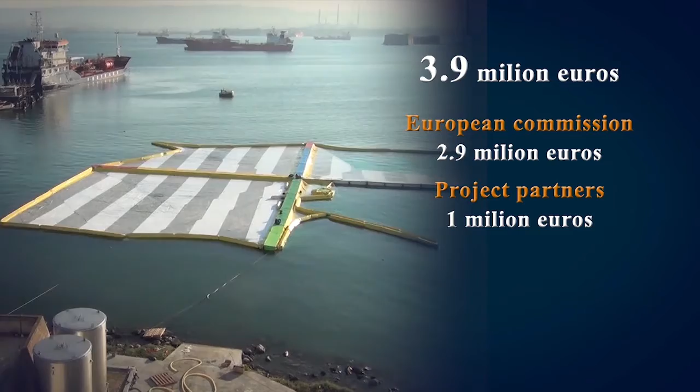the European Commission, and the residual part was funded by the project partners. The project will run for 4 years and will be ended in 2014. The coordination of the project is carried out by the Department of Chemical Engineering, Materials and Environment, DICMA, of the University of Rome La Sapienza, and the partnership is formed by 10 subjects: Italian, Danish, Indian, Latvian, Jordanian and Spanish.

The infrastructures are located in the Bay of Augusta. The plant is built in sea in a watery mirror given in concession by the maritime state property for all the duration of the project, as well as the ground, where the equipment are positioned for the production of biogas.

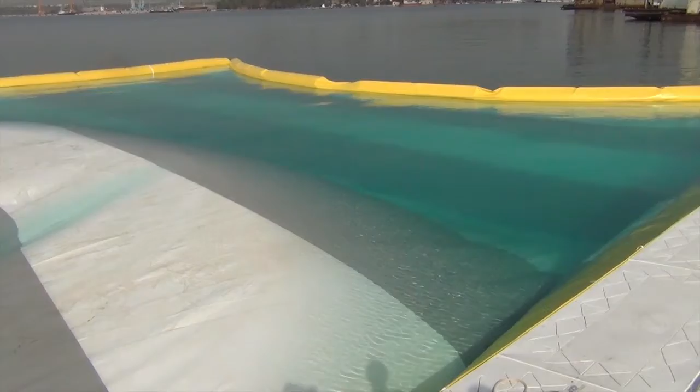All inputs will be introduced in 4 PVC open ponds, where the selected macroalgae will be cultivated, or in a homogenization tank. This allows the control of the cultivation parameters, unlike the open sea. In fact, jet air connected with the ponds will provide water and CO2 to the algae broth, guaranteeing biomass mixing.

The Biowalk4Biofuels project. Biomethane from algae as a vehicle fuel. Process description. The B4B process uses several units to produce renewable energy from algae. Let's follow the main points of the process.

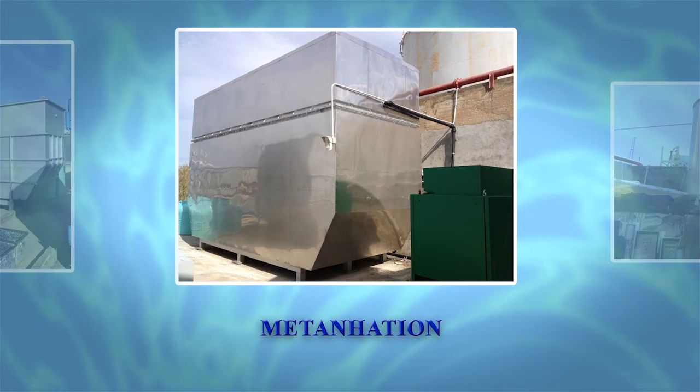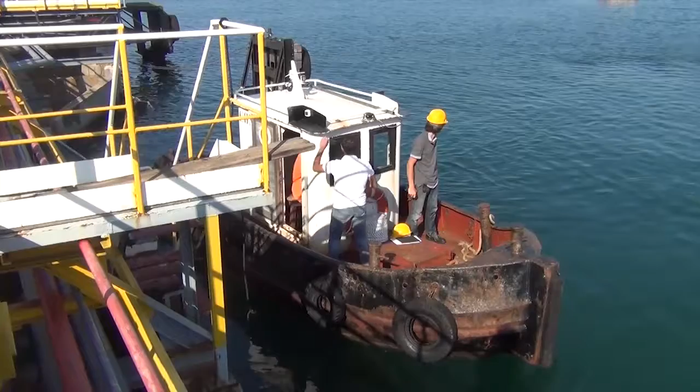The B4B promotes a new kind of algae cultivation using 4 PVC open ponds, in total 3,600 square meters, in which a macroalgae selected for the project was cultivated, Ulva lactuca. This artificial environment allows the control of the cultivation parameters, unlike what happens in the open sea. The ponds are provided with seawater and CO2 in order to guarantee both biomass mixing and CO2 fertilization.

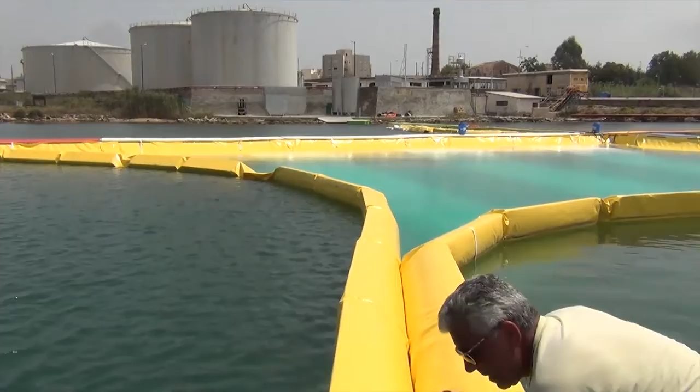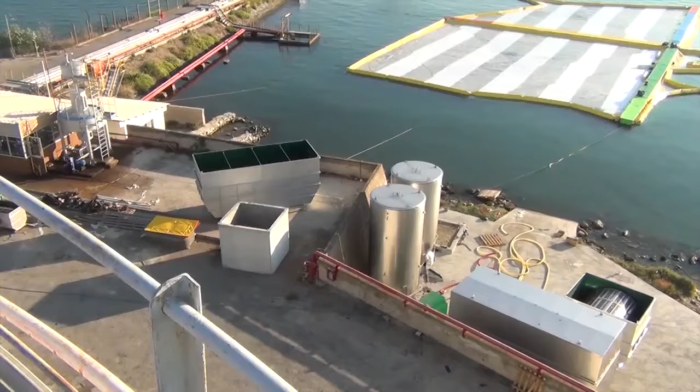At the same time, eutrophicational agents coming from the biodigesters, a unit of the process, were introduced after undergoing an appropriate treatment, achieving a closed cycle. The management of the cultivation assures a strict control of several parameters: pH, nitrogen compounds, phosphates, etc., avoiding uncontrolled water exchange with the open sea.

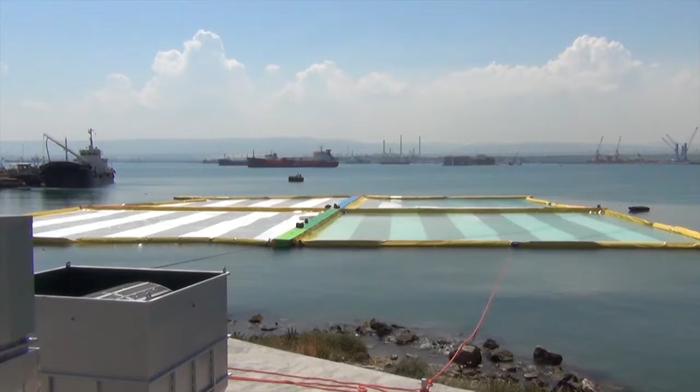Controlled open ponds. We have designed a remote control system that, thanks to the electronic sensors, remote-controlled valves and remote-controlled pumps, permitted all the Biowalk4Biofuels partners a total remote control of the entire demonstration plant. Thanks to this advanced package of software and tools, we were able to assure a remote management and supervision at a very high level of safety and reliability.

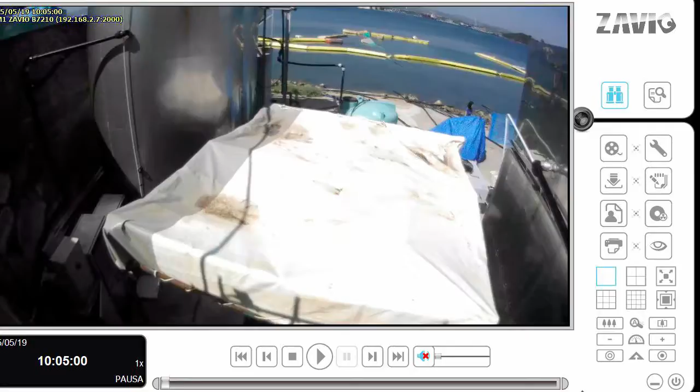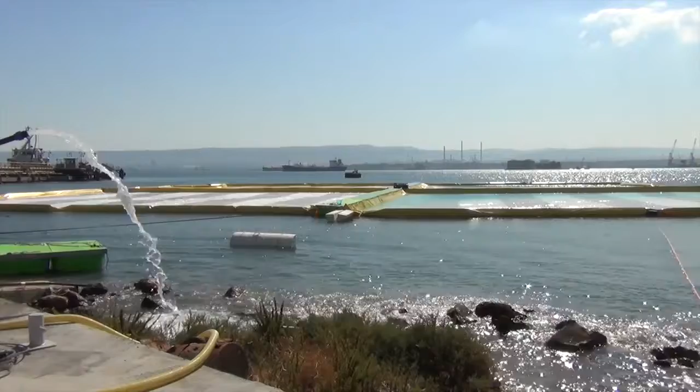The construction of the open ponds plans to achieve 2 important targets. First of all, algae growth is related to the climatic conditions of the place where the cultivation is established. Second, the system allows to optimize costs in order to produce an amount of biogas of 20 cubic meters per hour, sufficient to power the cogenerator and ensure a sustainable energetic process. An input of 400 kilograms wet of algal biomass in the B4B digester, and 3,600 square meters of open pond surface are necessary.

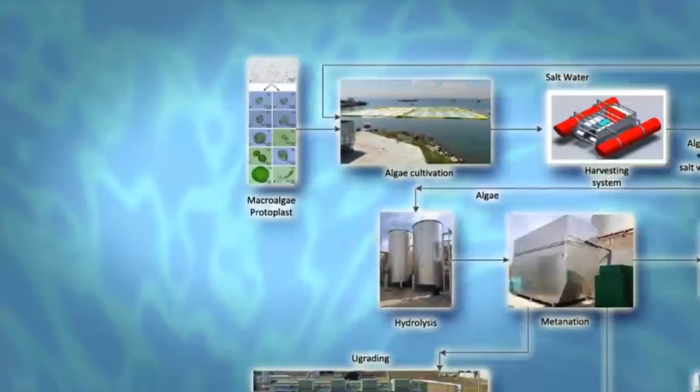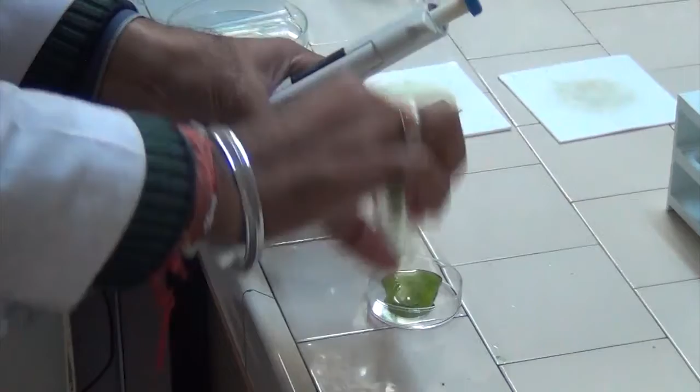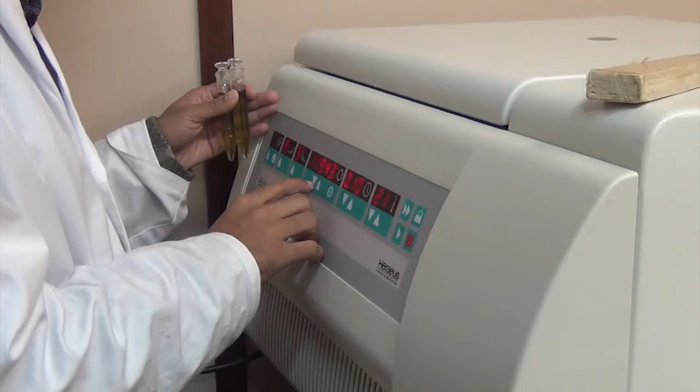Protoplasts. The use of protoplasts as feedstock for cultivation using a protoplast-based seedling production facility made easier the generation of required seedstock for feeding of floating tanks regularly. A protoplast incubator was to be used to produce protoplasts to feed the open ponds with new little algae. This type of cultivation in an incubator results in an increased productivity and a higher biomass yield.

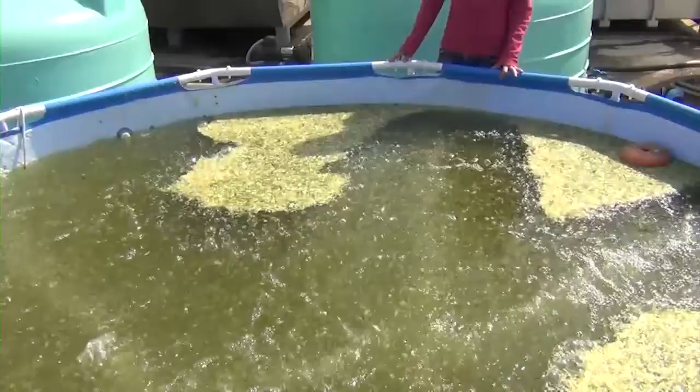Protoplasts are living plant or algae cells without cell walls, which offer a unique uniform single-cell system that facilitates several aspects of modern biotechnology. The incubator aims at demonstration of the use of protoplasts as an alternate source of spores for cultivation of green seaweed Ulva. This facility basically facilitates continuous production of seeding biomass required for a large-scale cultivation.

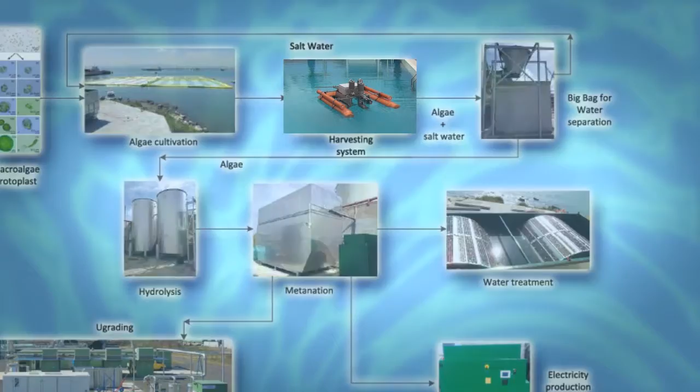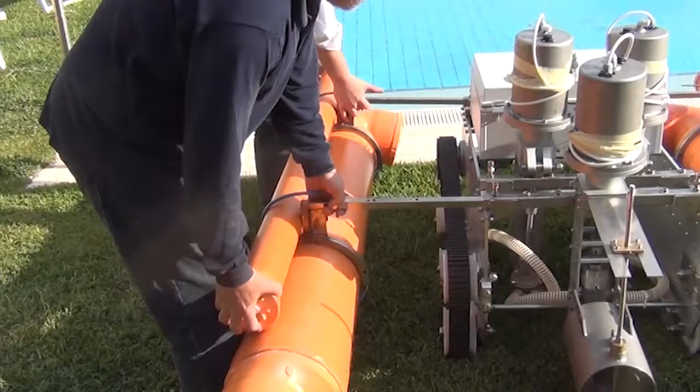Harvesting system. The harvesting system represents the link between the open ponds and the subsequent anaerobic digestion process. For this task, we used an automated drone planned and engineered for the B4B purposes that could harvest directly in the open pond the daily amount of algae. The drone took the algae amount close to the collection point, where a pump sent all harvested algae to the

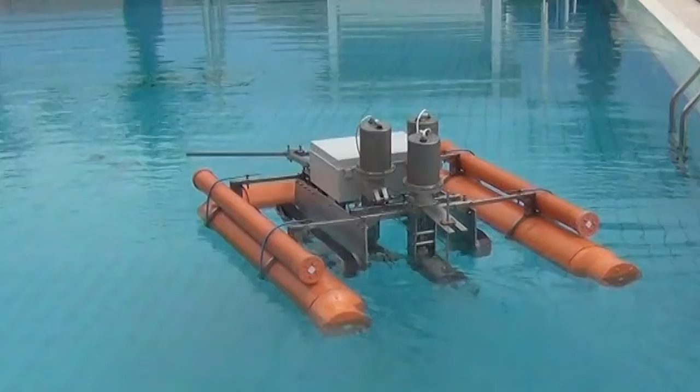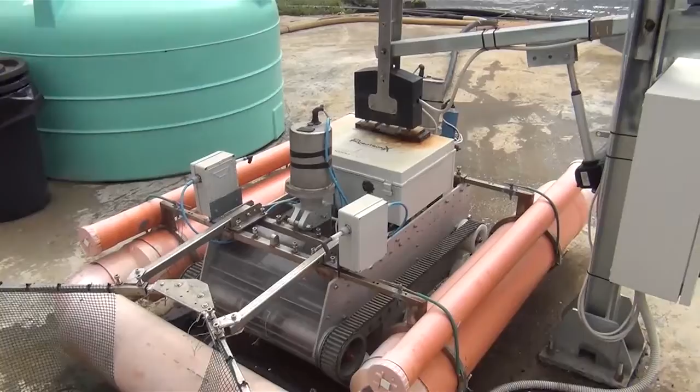preparation section. All the harvesting paths and the return paths to the base for battery charging are guaranteed thanks to a precise GPS system mounted on board that exchanges data with the central server. All the technology for the construction of the drone was developed by the partners involved in the design and management of the harvesting system. The automation system is managed by software developed in the programming language LabVIEW, totally open for the necessary changes during the research.

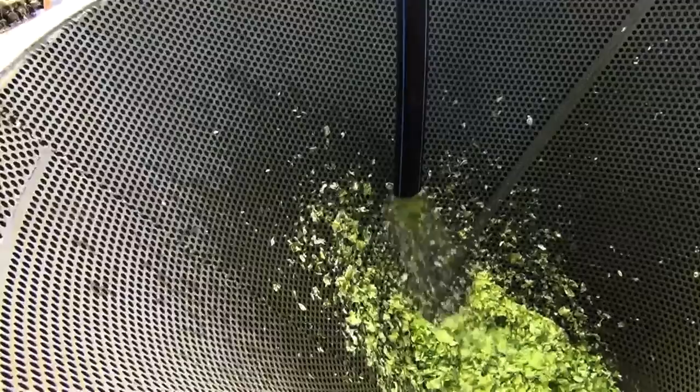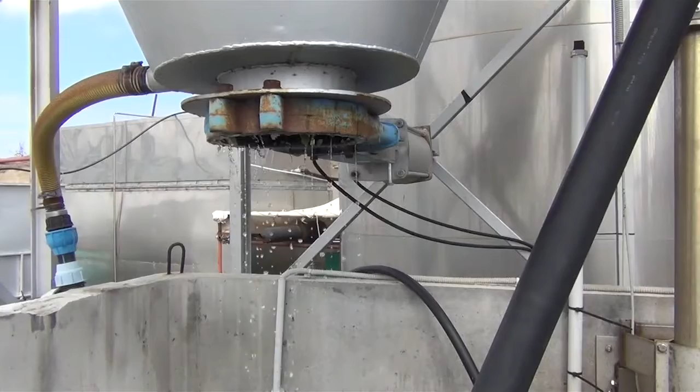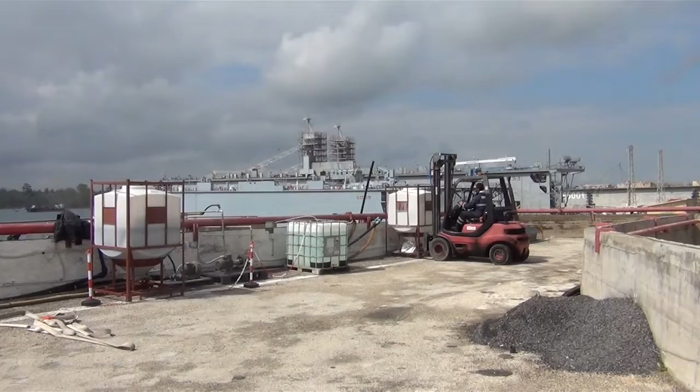Preparation tank. The preparation of the biomass mix, which is the input of hydrolysis and methanization, takes place in a pre-treatment phase. In this step, there are many sensors monitoring the level of input biomass, giving the start-stop input to a grinder pump and a signal to open-close automated valves. The preparation tank, whose volume is 12 cubic meters, receives all the biomasses used in the process, and thanks to the grinder pump and clean water, permits better control of the density of biomasses in the input of the hydrolysis tanks.

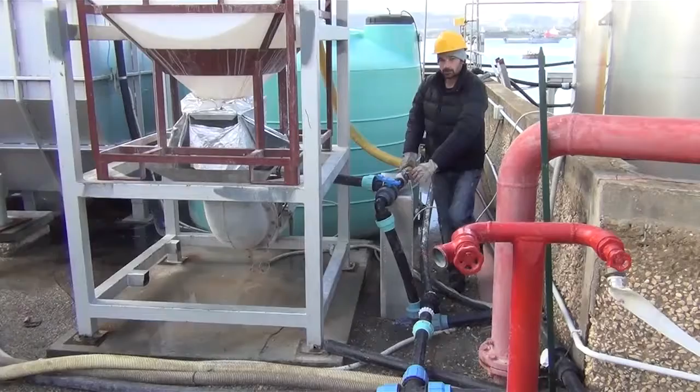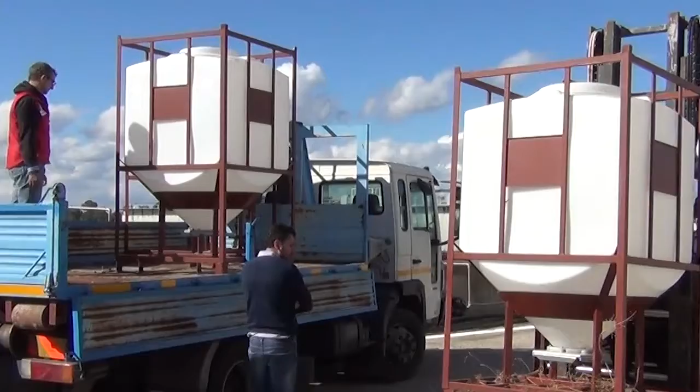Big bag for macroalgae biomass. The big bag permits to separate, for each batch input, 500 liters of salt water from wet algae without using energy. From the big bag come macroalgae biomass harvested from open ponds. The big bag castle is placed over the preparation tank. Thanks to the software developed for this process, it is possible to automatically control the charging phase of the algae and their separation from the salt water and its recirculation to the open ponds.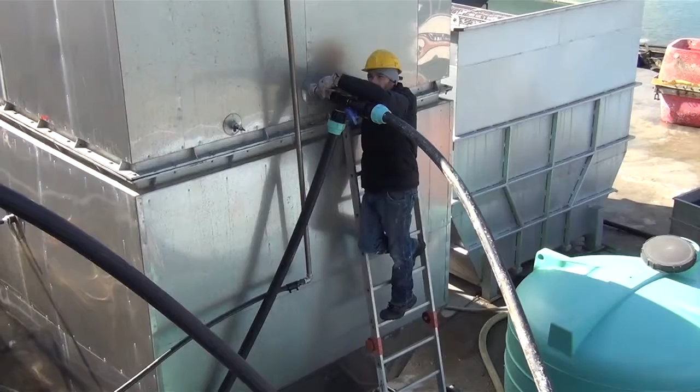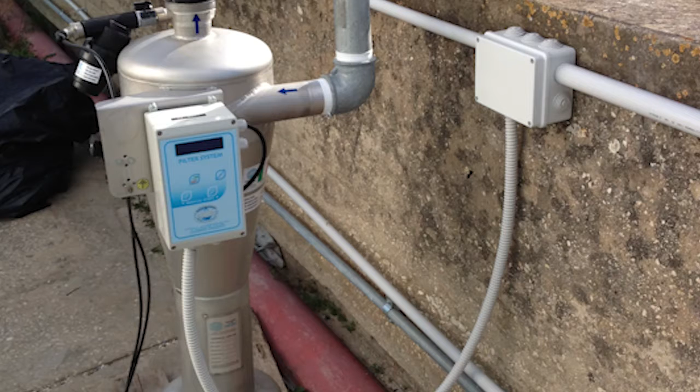Homogenization tank. The homogenization tank is built of inox steel to prevent the corrosion of the salt water and has a 30 cubic meters volume. This tank allows us to have always at our disposal an amount of well-mixed biomass to be used in the digester unit. Before entering the homogenization tank, the biomass is pumped in a hydrocyclone for the removal of sand. In the output of the homogenization tank, there is a pump operated through an ABB inverter that allows the variability of the flow.

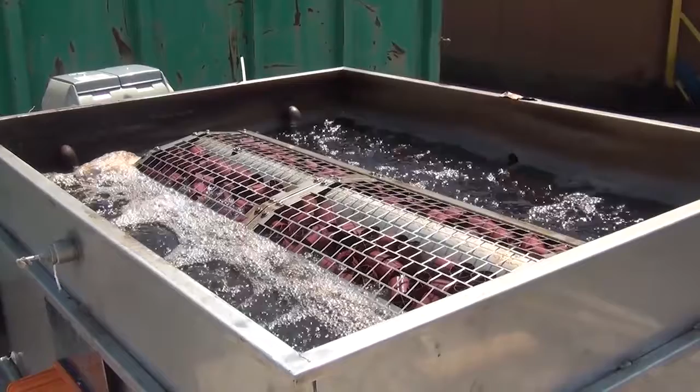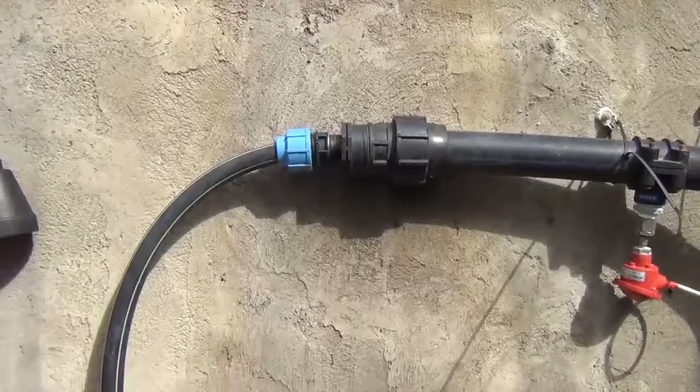Methanation. A two-stage reaction system has been proposed as a solution to improve the overall process efficiency in terms of biodegradation rate, yields and overall energy productivity. In fact, splitting hydrolysis, acidogenesis and methanogenesis enhanced the overall reaction rate, maximized biogas yields, and made the process easier to control both in mesophilic and thermophilic conditions. Moreover, enriching different microorganisms in each anaerobic digester, the two-stage AD should extend the possibility of processing different biomass species, enhance substrate conversion, improve the chemical oxygen demand (COD) reduction, and upgrade percent energy recovery.

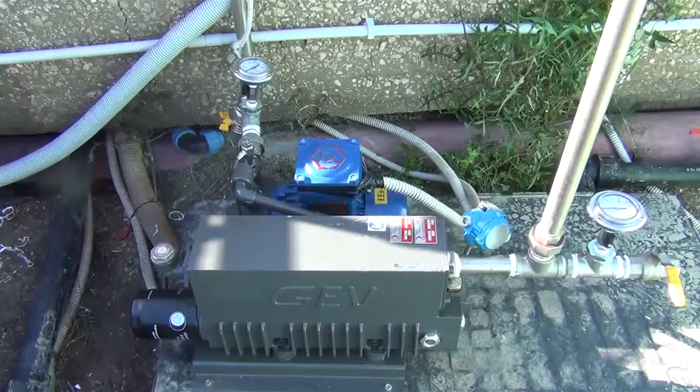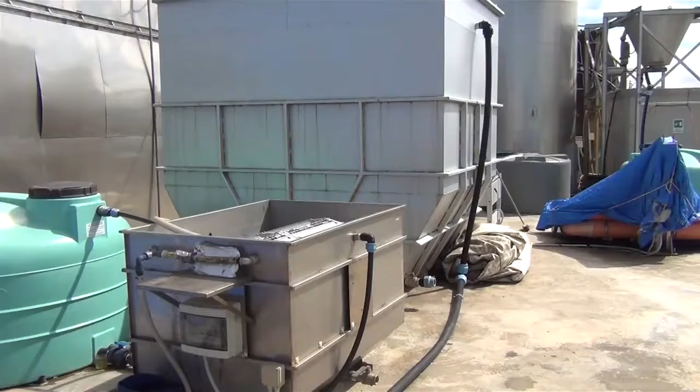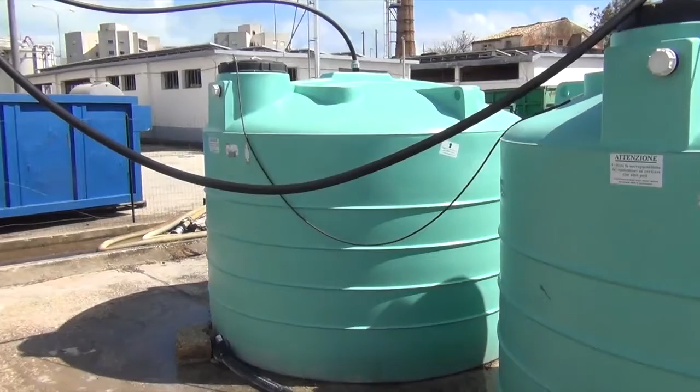The first reaction step takes place in two CSTR reactors in series which operate at high temperatures, approximately 70 degrees. This temperature is kept constant through a heat exchanger located inside the reactor. In the hydrolysis reactors, mixing takes place thanks to a system of gas lifters that consist of a gas blower. The conversion of biomass into biogas occurs inside the methanation reactor. The innovative aspects of this reactor are the B4B rotor and the mixing system.

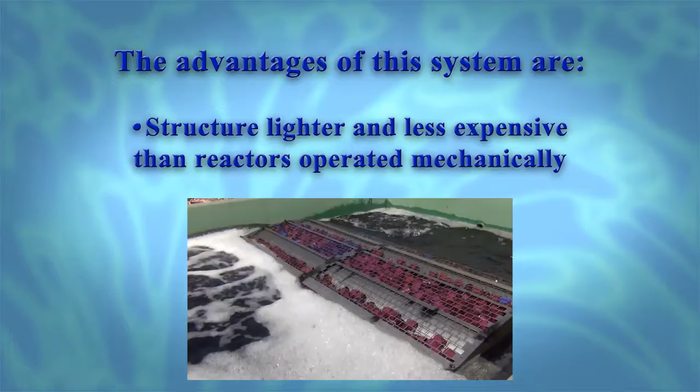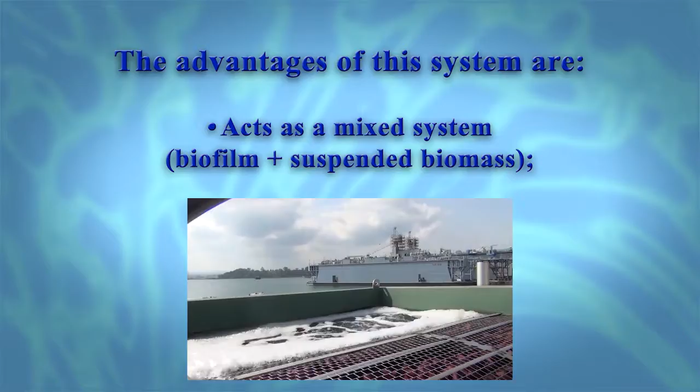The drum rotates using the biogas produced by the anaerobic digestion that is blown on the bottom of the reactor close to the sidewall of the drum. In this way, the biogas, which tends to rise, applies a moment to the rotor able to rotate it. The advantages of this system are efficient handling of suspended solids in a wide range of rotational speed, and a lighter and less expensive structure than reactors operated mechanically. It acts like a mixed system, biofilm plus suspended biomass. It requires very little maintenance. It can work with very high organic loads using a total volume smaller than the one required in conventional reactors.

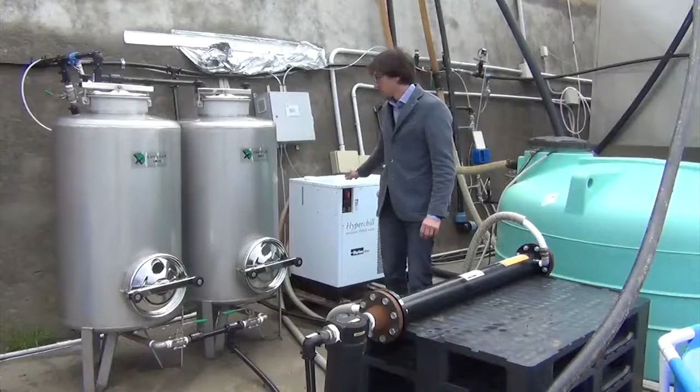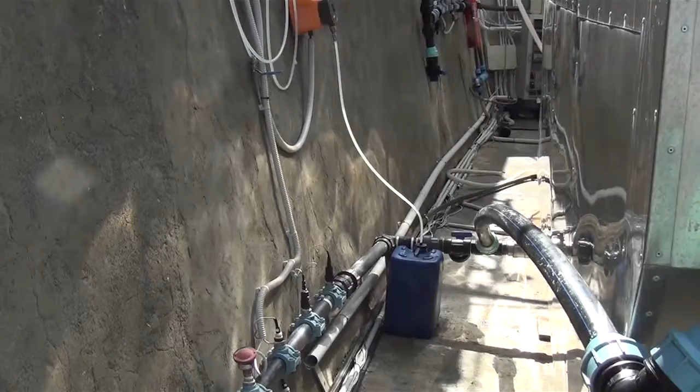Cleaning and safety flare. The biogas produced in the methanation reactor contains, in addition to methane and carbon dioxide, water vapor, ammonia, and H2S. The concentration of these gases is monitored by a gas analyzer connected to the input and the output of the cleaning section of the biogas. The compounds that must be removed in order for the biogas to be used are water vapor and H2S. Then the process of purification, gas cleaning, of biogas provides a dehumidification by chiller and a desulfurization by adsorption on activated carbon. The condensation is an important physical method for removing gas or vapor pollutants.

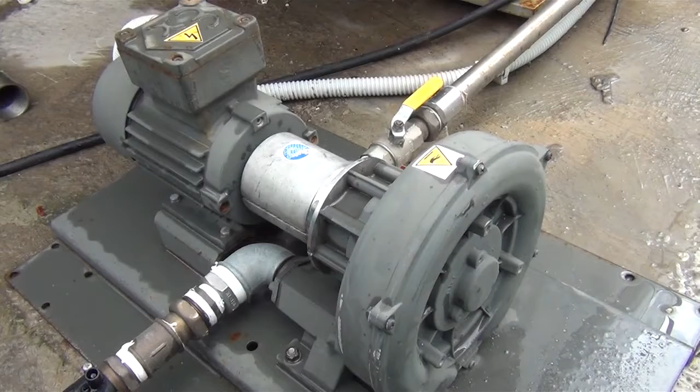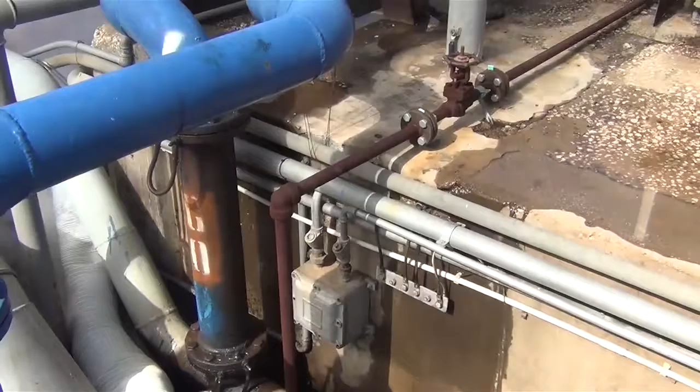The process consists in cooling the stream in order to reduce the saturation pressure and consequently trigger the condensation of the species. In order to maintain the values of H2S in the biogas below the limits prescribed by law, the biogas is sent to an adsorber with activated carbon. The adsorption consists in transferring a chemical element from the gaseous phase to a solid phase.

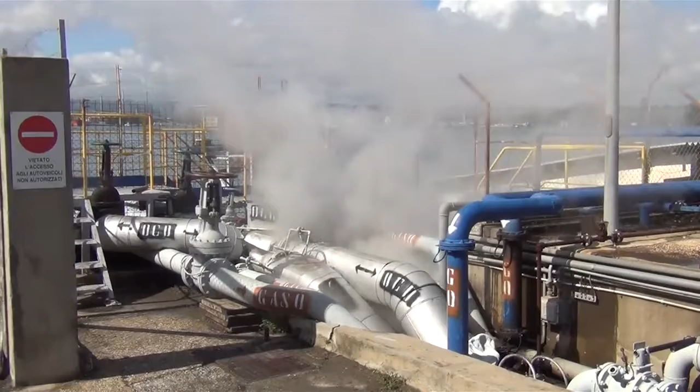A safety flare is used in biomass plants to ensure a controlled combustion of the excess gas produced by the anaerobic digestion section. The apparatus is composed of several elements, but the most important are two. Ignition electrode, generating high voltage electrical discharge during startup. UV sensor, continuous detection of the presence of the flame.

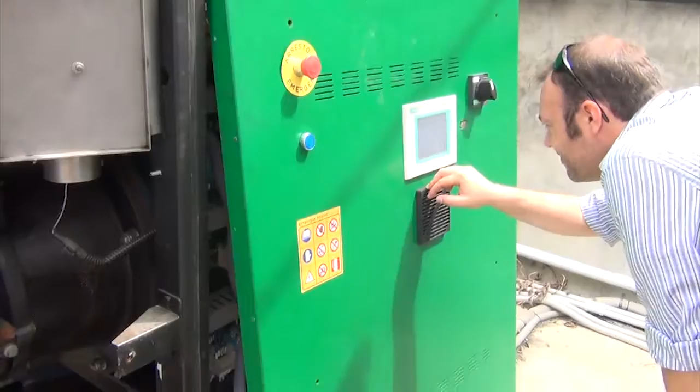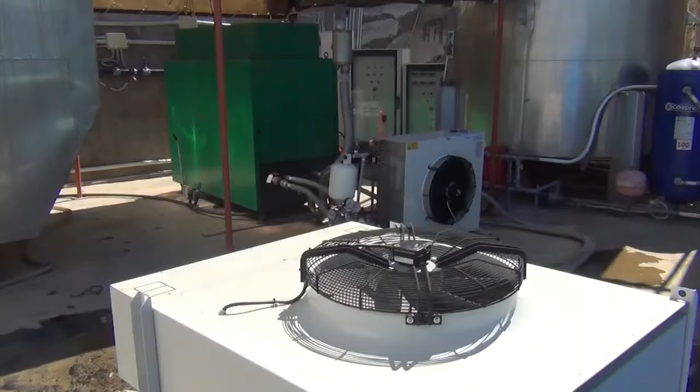Electricity production. A 45 kilowatt cogenerator produces electrical energy using as fuel the biogas produced by the methanization process. The CHP unit installed in the B4B system is an Iveco Tandem T45. The cogenerator heat recovery from the flue gases and from the cooling circuit of the engine is useful for heating the digestion process. At the same time, an electrical output equal to half the thermal energy generated is produced.

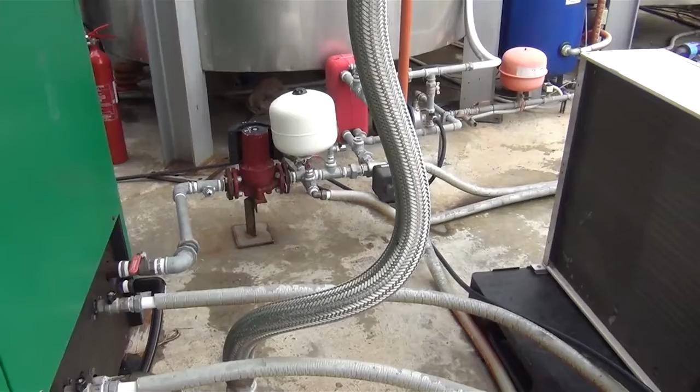In the hydraulic circuit of the motor, cooling water outlet temperature is 80–85 degrees. The water circuit transfers the accumulated heat to the hydrolysis tank. It was necessary to install a heat sink to ensure the cooling of the liquid in case of insufficient heat exchange for the hydrolysis, in order to have a lower return temperature of the liquid, to 73 degrees.

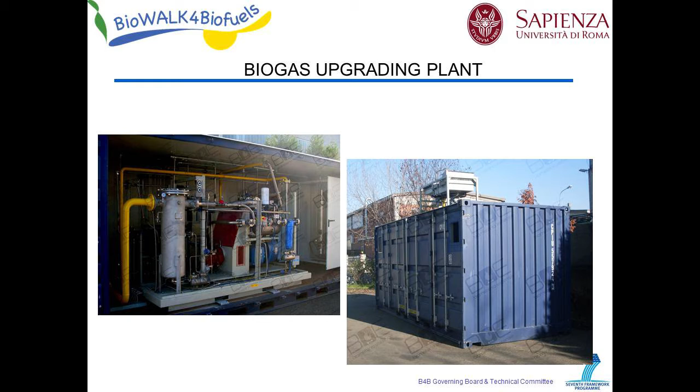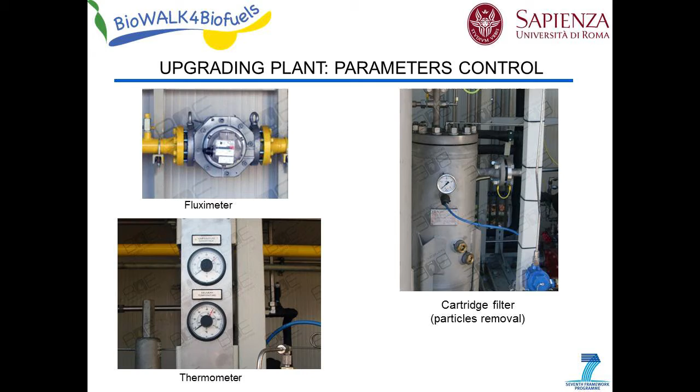Upgrading. Several upgrading processes have been analyzed to separate the biogas impurities and CO2 from CH4. In this way, compressed biomethane gas for automotive purposes or natural gas grid injection can be produced. The characteristic of the upgrading system analyzed is the ability to equalize the composition of the biomethane, treating biogas produced by very different biowastes.

To produce a cost-efficient, low-energy intensive, purified biogas, biomethane, to reduce negative environmental impact from industrial greenhouse gases and from biowaste is now possible thanks to the Biowalk4Biofuels project and to the work done by the international partnership. We are looking forward to future developments and we are ready for new challenges in other world sites.